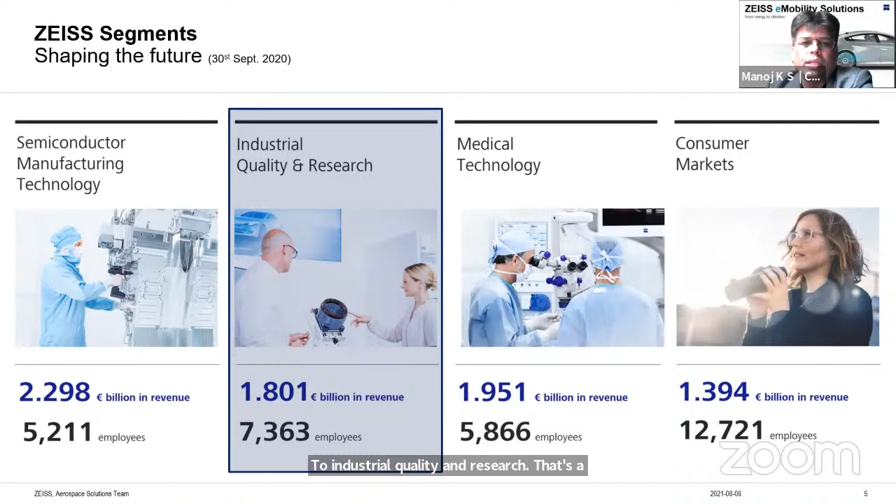I think Aanand mentioned that he has used Zeiss consumer lenses, and you could come into our Bangalore office where you can get these lenses tuned to you. We both, me and Hemanth, and this discussion belongs to industrial quality and research. That's the vertical we represent, so industry quality and also research. So these are the three topics.

Yeah, Hemanth, would you like to comment on this? Basically, industry quality and research is the division we belong to, and we are again subsegmented into industry quality solutions, and then we have a research microscopy solution.

So we belong to IQS, and here what we do in industry quality solution is the product we handle. Basically it belongs to contact and optical measurements, that's how we classify them, and computer tomography, which is basically X-ray based. Once we do the measurement, we do a complete analysis, and also we manage the complete data. So this is the product line we handle from industry quality solutions.

And from RMS, that is research microscopy solutions, we provide products like light microscopy, scanning microscopy, electron and ion microscopy, as well as X-ray microscopy. So these are the product lines the other divisions handle. But we, from industry quality solutions, have good connects with the industry, so some products like the light microscope or the electron microscope we also combine, and sell as a complete package to the industry, right from CMM to the industrial microscopy solution. That's the product range we have.

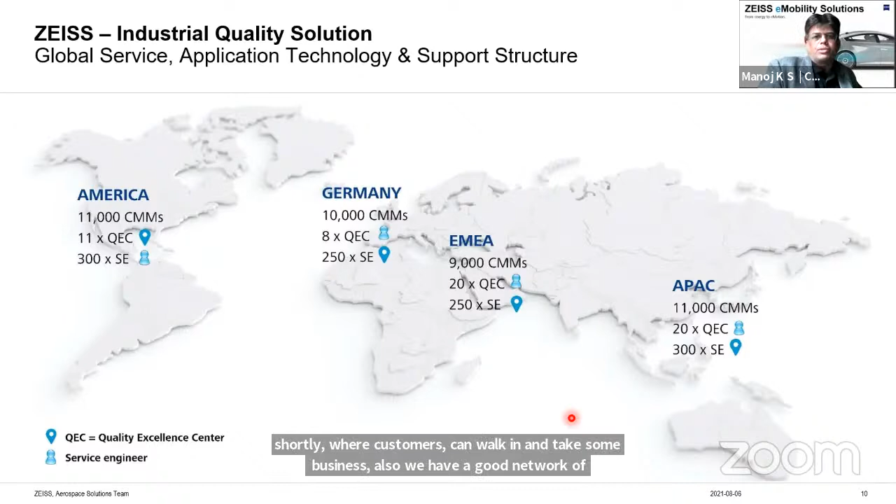Jumping into the subject, we all know we are at a crux of transformation, which has also been highlighted in the Samurai Awards discussions many times in past weeks. We are moving slowly from being an auto component and auto OEM industry into different areas like electronics, NEVs, and also the windmill industry, which is growing quite a bit, as well as aerospace, medical, and so on. A growing country like us would have to have good synergy among all these industries to lead forward.

Moving on, we would like to discuss these new industries. We'll pick up a few industries, a few applications, and see how our solutions are supporting customers. I would like to qualify one statement here: we are mostly into dimensional metrology, that is measurement of dimensions, measurement of heights, measurement of distances. So that is our key profile as a company.

Each of these industries has different problems. When you look at the electronics industry, the requirement is high volume. Whether it's USB sticks, mobile phones, or chargers, they are all made at huge volume catering to growth. So you need to be really fast, with a high-speed measurement technique to qualify the products. There are also complex micromechanical issues, because when you insert a USB charging point, the charging connector has to really sit properly. There are micromechanics inside which make it happen and make it reliable, and those topics have to be taken care of.

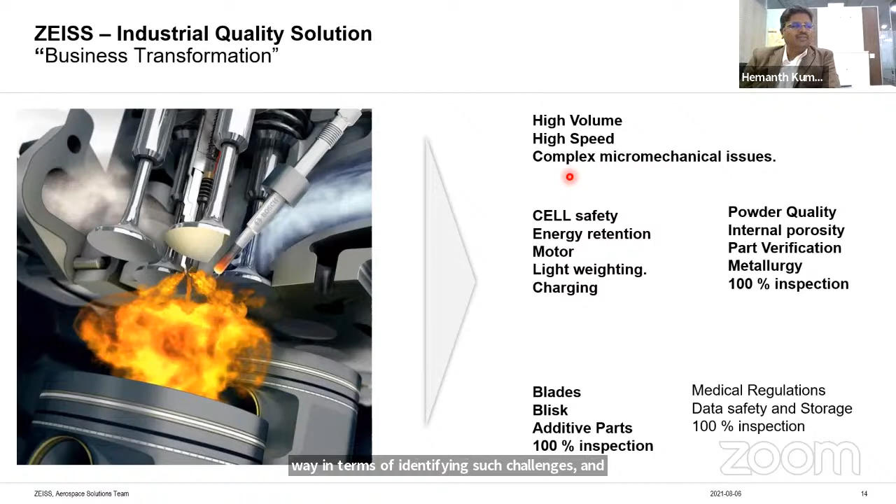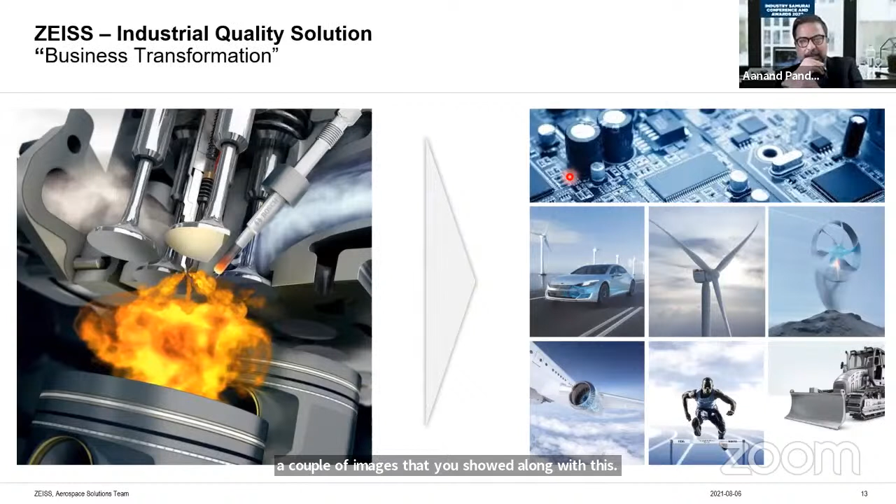I also had a question regarding the couple of images you showed along with this image on the left. What is that icon next to the windmill on the right side? This one? Yes, this one. It's like a trophy. Right, our marketing people imagine a little too much sometimes, so that's what you see here. Let me explain. What you see at the bottom looks like a mountain, but actually it is a powder.

And the powder gets formed into an impeller or a rotating element. So that's what you see there. So this is a new, upcoming manufacturing field called additive manufacturing.

This is again a complex field which is coming up because when somebody wants to rapidly develop a concept, rapidly develop a component, it is easy to develop it in additive manufacturing. It is almost like cooking. I don't want to get into details, but it is an upcoming field, very much useful in aerospace.

Also, I am told that when you are talking about cars which have personalization, additive technology will be used very much. Also in the EV industry, when we are talking about a few vehicles initially, let's say a startup wants to make a few vehicles, he will not go the standard process of mold making, casting, machining. He would rather do the whole process in an additive way. So additive manufactured cars are available, running in prototype and experimental stages. So very, very interesting field, Aanand.

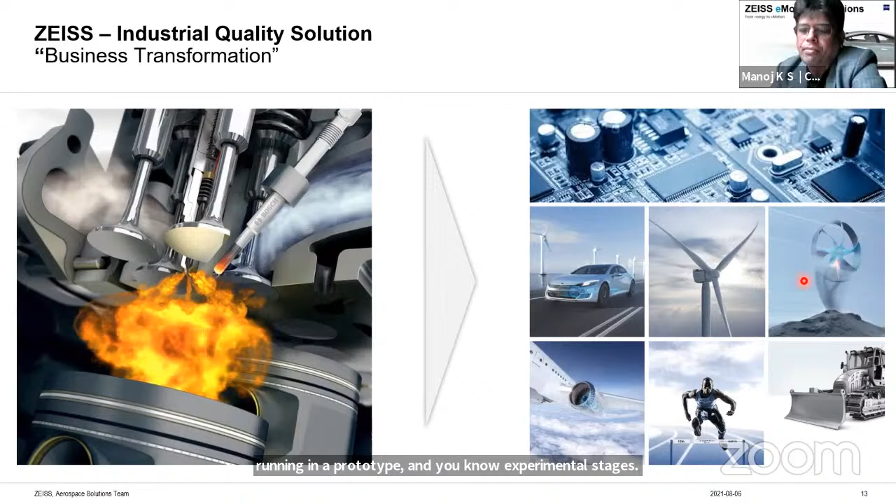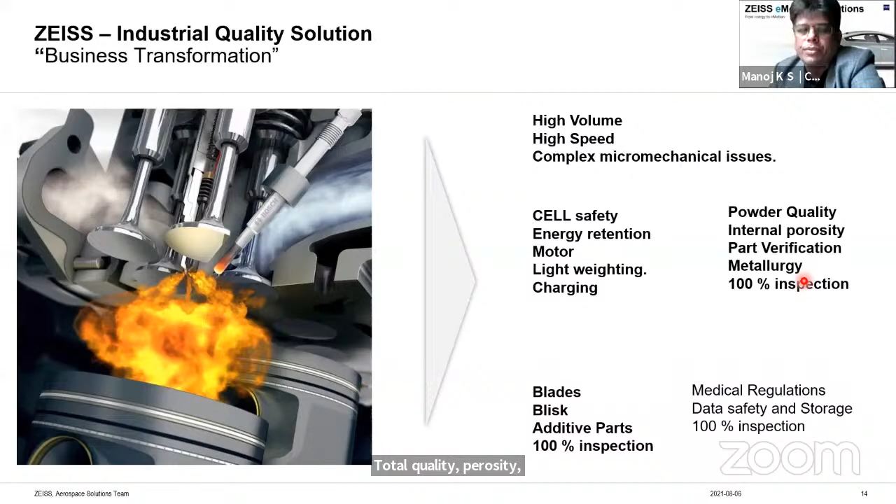And these are the challenges around that field, what we address, but we will not get into that subject today: powder quality, porosity, part verification, metallurgical topics, and so on. So does that clarify, Aanand? Absolutely. Yes. Okay, good.

Traditionally, as you know, Hemanth, metrology was a separate room. If you go into an automotive company, there will be a standards room or metrology room, which will be, say, about 200 meters away from the production area. So the production guy would walk in with a part every 1 hour or every 2 hours, depending on the process challenge, get the measurements done and go back, which would roughly take from the time the part is cut to the measurement result in the hands of the operator about 1.5 to 2 hours. There are thermal issues around it, why there is a time delay.

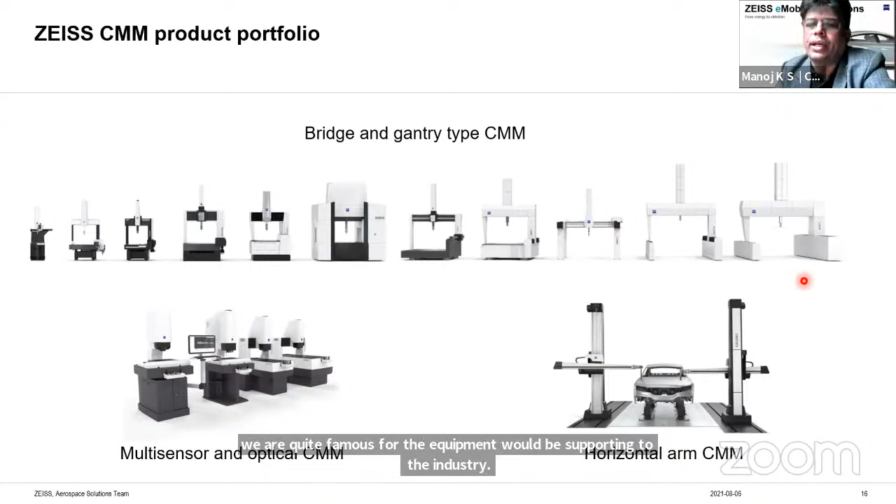So, thanks, okay, we'll now jump directly to this slide, which we are quite famous for - the equipment we supply into the industry. Talk about any OEM, any tier 1, tier 2 in India, they have a plethora of these machines, so we will not talk about this in detail.

Talking about new age industries, the electronics industry has a lot of micro issues starting from a few nanometers and so on. We will discuss this a little using microscopy solutions. Also a key topic that will create a paradigm shift in the industry - we will talk a little about batteries, lightweighting, car body and so on in the new energy vehicle space. We can move on, Hemanth, or do you have any questions?

Yes, I have quite a few questions on this slide, so we could address those later during the discussion. Aanand, do you have any question? Yeah, I have many questions on this. Oh yeah, okay, answering them could require some time. Maybe we could take these up during the following discussion. Okay, perfect, so we should cover ground.

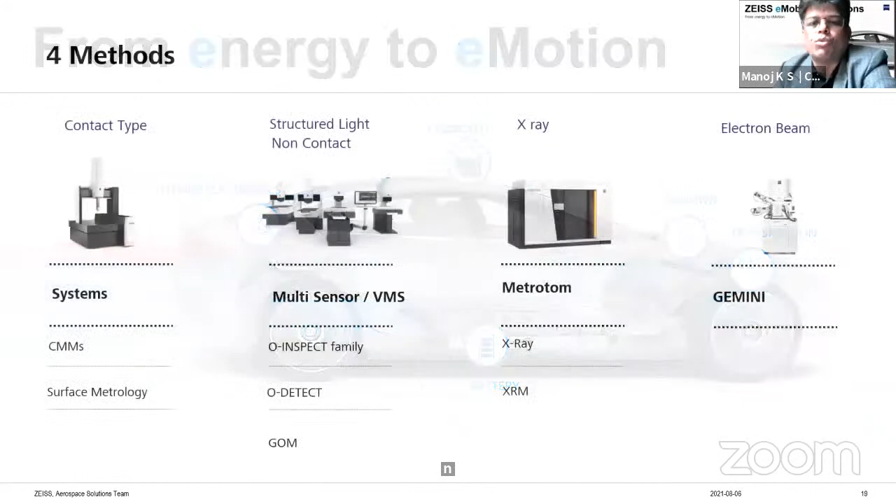So let us move on. Let me quickly tell you that as a measurement company, we have 4 methods of measurement: contact - touch and measure; see and measure; throw a structured light and measure; and the third one, X-ray - X-ray the component and look at everything inside.

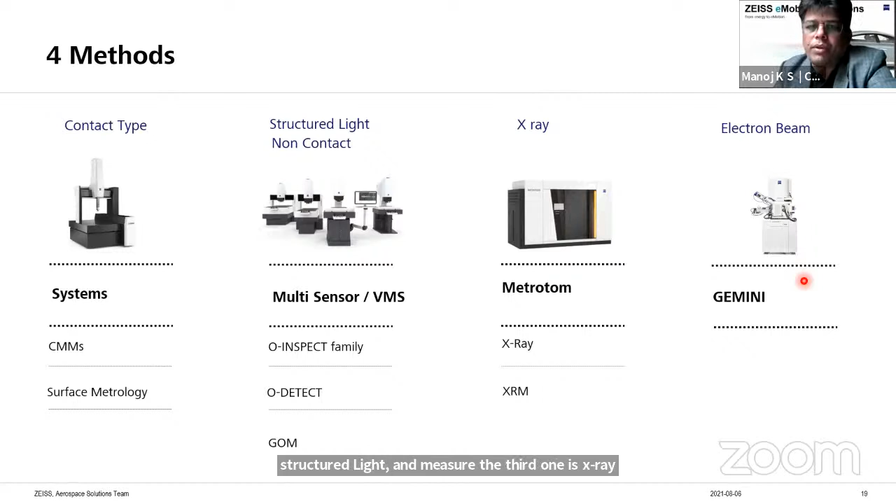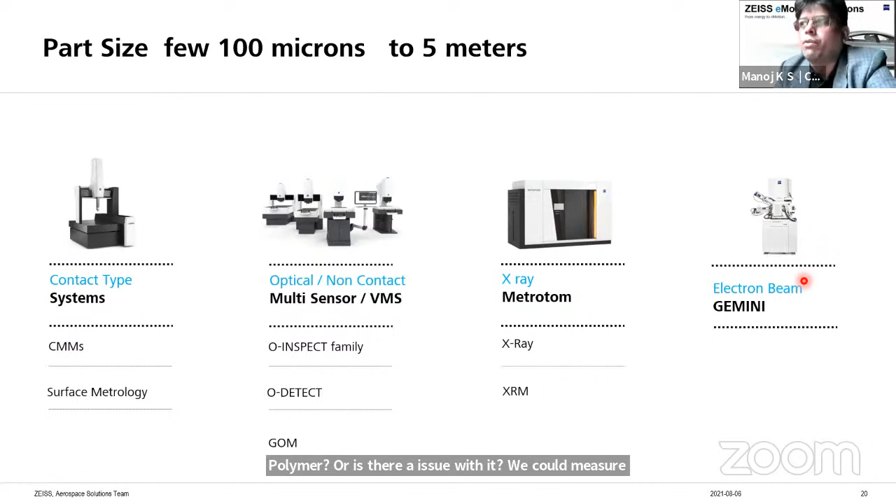That is a topic we will discuss in detail today with Hemant. We can measure anything from a few hundred microns - if you have an issue, if you have a residue that is captured and you want to find out what the residue is, whether it's a metal or a polymer, or if there's an issue with it, we could measure anything from a few hundred microns to about 5 meters for its dimensions, and a little bit of chemistry.

Now this is the most famous slide Hemant is very familiar with. So Hemant, please go on.

Thanks, Manoj. So basically on the X-ray product, we broadly classify X-ray into 4 groups. On the top left side you see a Metrotom, which is basically a high precision metrology and inspection machine. These Metrotom machines sit in a lab, and here with X-ray we focus more on the resolution aspect. In general, what we do with X-ray is place a component inside the machine, and the output is a virtual image of the part - a representation of how the part looks inside in 3D space.

So the part can have porosity. If you want to see the porosity, you can measure it and classify it depending on size. This is what we do on an X-ray machine. So one part is porosity, and in high precision metrology and inspection Metrotom machines, we not only see the defect, we also do a measurement, just like how we do it on a CMM. The advantage is whatever you see from outside you can measure, and whatever you are not able to see from outside, inside also you can measure.

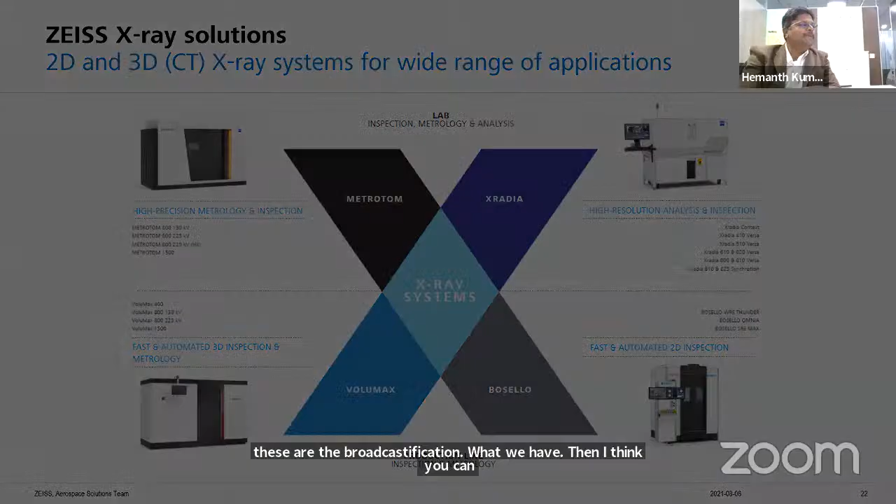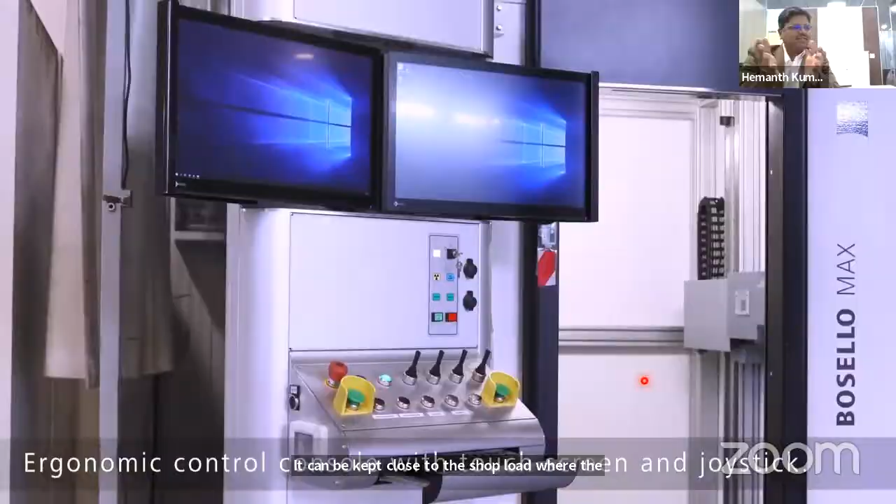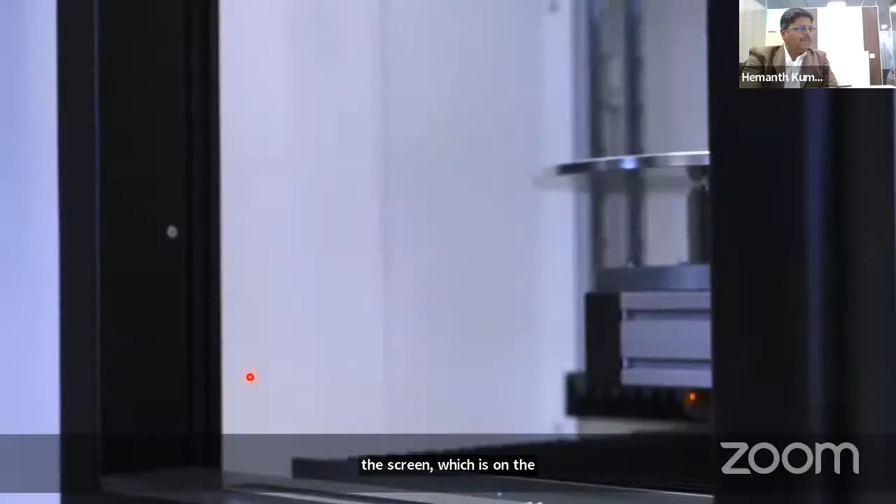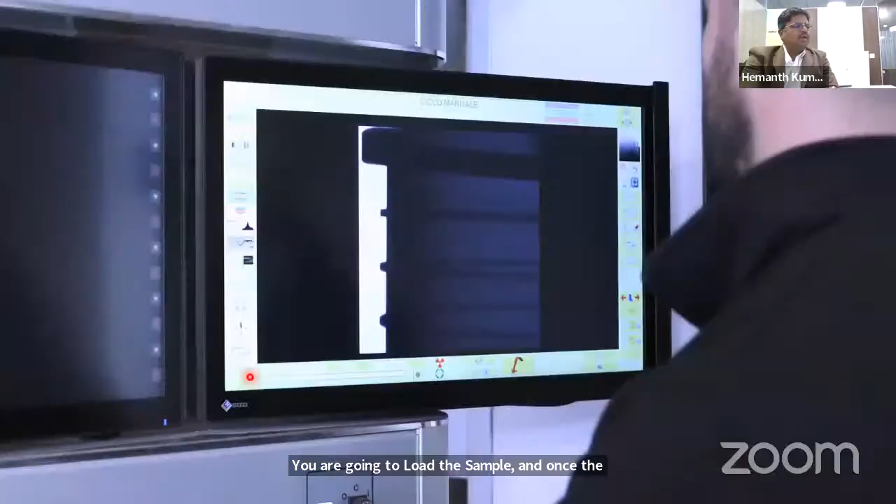Yeah, this is the shop floor machine. This machine we call an at-line machine. It can be kept close to the shop floor, wherein the part, as soon as it is cast from the casting machine, can be brought into this machine. Here you see the detector on the screen on the left side, and on the right side, this is the X-ray. We have a table coming out, and on top of the table, you load the sample. Once the parts are loaded, this is the complete X-rayed image of the part.

So here it can show you some defects, and there are analytical tools wherein you will be able to check whether the part is good or bad, and whether the defect inside is allowable or over the limit.

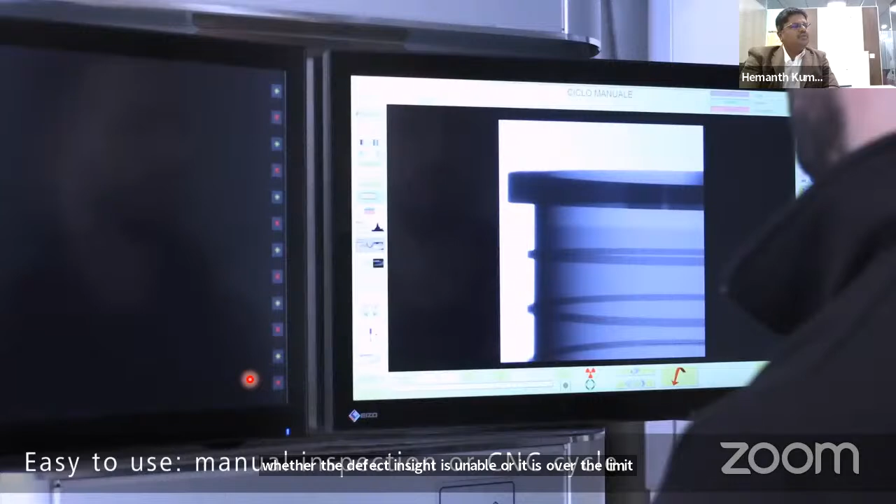The video is stuck. Yeah, now it's moving. So these are certain analytical tools.

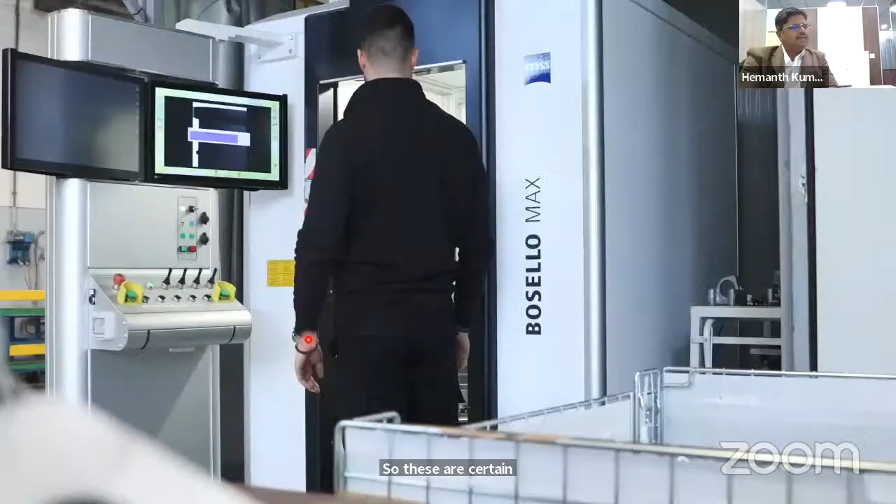Yeah, once the parts are inspected, it is done. So this is how it is normally done on the production floor. The requirement of the industry now, because of EV, there are a lot of safety factors coming in, and more requirements for 100% inspection. So the machines you saw in the video are used for 100% inspection for some of the critical components.

So that component, what was there, Hemant? Looked like a motor casing. Yeah, it's a motor casing, and the porosity in those casings is very important. That goes into EV vehicles, and they look at this porosity very critically. That's where we help our customers identify defects in those parts, and there are already a lot of users of our machine in this particular application. I may also add, the component you saw was a motor stator.

You may think we have been making motors for many decades, so what is the need to check an EV motor so stringently? The point is EV motors are now made of aluminum, not iron casting like a typical motor. The reason they moved to aluminum is all components in a car are dead weight except the passenger, whose transport is the basic purpose, not the heavy structures. So the designer's mind is on lightweighting. The motor casing is hollowed out in many places, keeping only the structure intact. So when you hollow out and thin it out, you need to check and compare the integrity with the design model. That's the basic purpose why X-ray is being done.

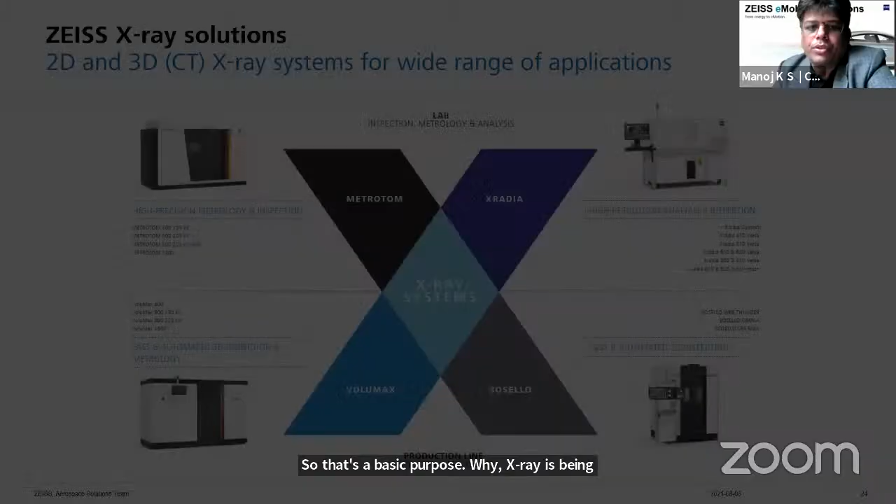Good, so let me now shift to 3D. What you saw is a two-dimensional X-ray, similar to what a doctor would see. If you recollect, we mentioned operator judgment, and Hemant showed certain tools in the video. If you go to a doctor and he looks at the X-ray, it's basically his judgment to tell you how good or bad the issue with your bone is. Here in industry, we wouldn't like an operator to do that. We want automatic software recognition, AI recognition to do that function. So that's part of the 2D X-ray tool, that you could have automatic defect recognition in the anode, cathode, or these kinds of casting components.

Okay Hemant, I'll move on to the 3D topic. Basically both in 2D and 3D we have automatic defect recognition software, which enables the operator to make the judgment faster. These machines are kept in serial, and all the parts that come in get measured and automatically move on to the line. So this can be completely integrated into an automated line as well. This is how a few industries are using this machine.

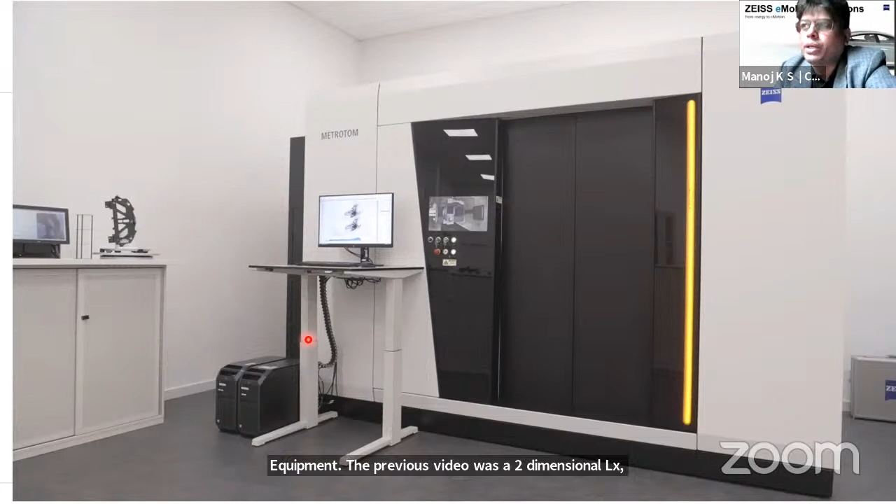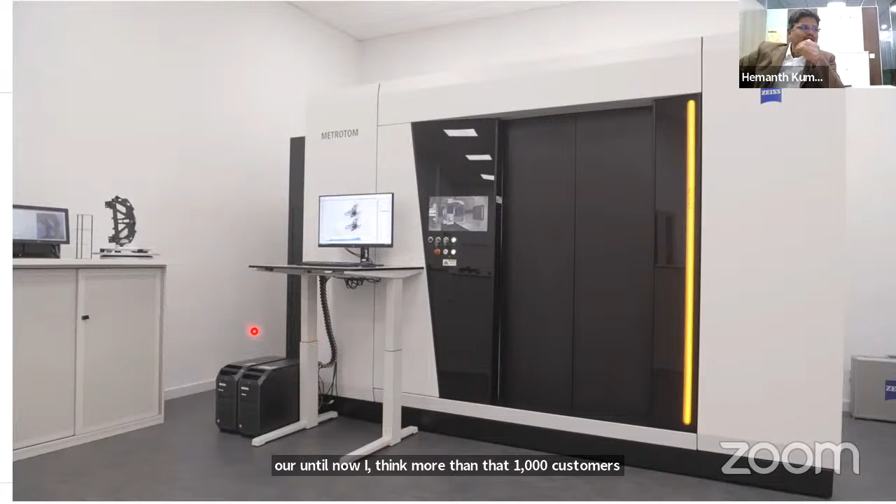Good, so here is another video with different equipment. The previous video was a two-dimensional X-ray; this is a three-dimensional X-ray. Do we have this equipment in India, Hemant? Of course, yes—in our Bangalore facility as well as in Pune, we have a Metrotom and Volumax machine in both facilities. We cater to more than 1,000 customers who have visited our tech center and taken measurement services from these machines. The results for them are absolutely unbelievable, because all these days they could only see the features outside. Now they can see what is inside the component, and the biggest advantage is the design-to-market time has reduced drastically because of this technology.

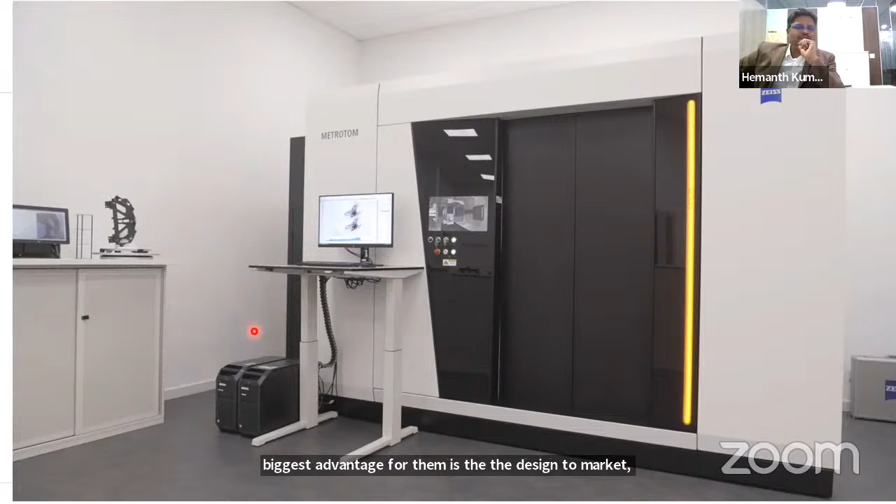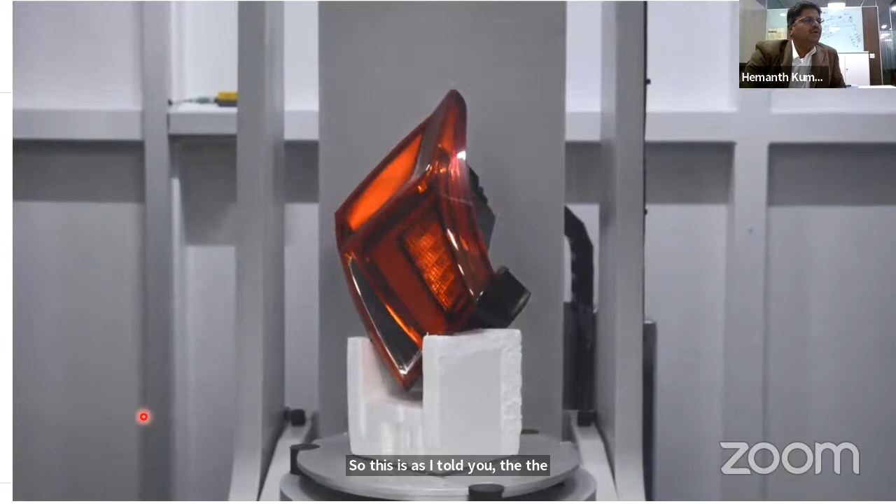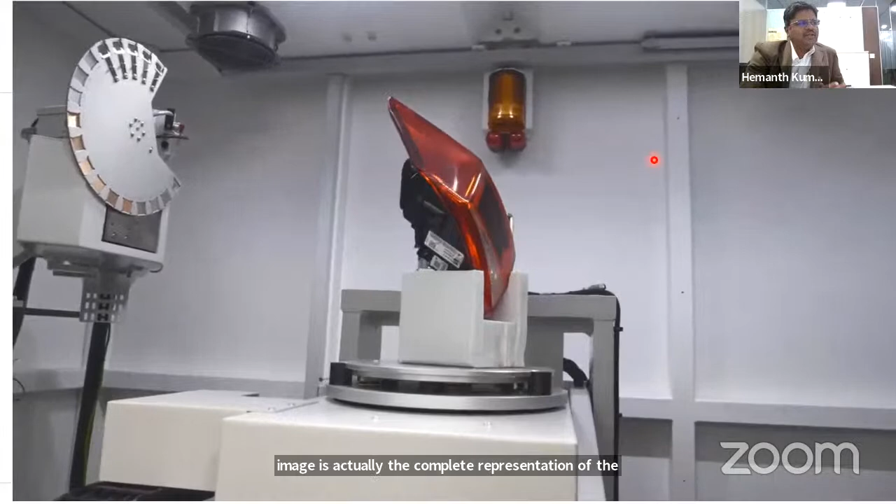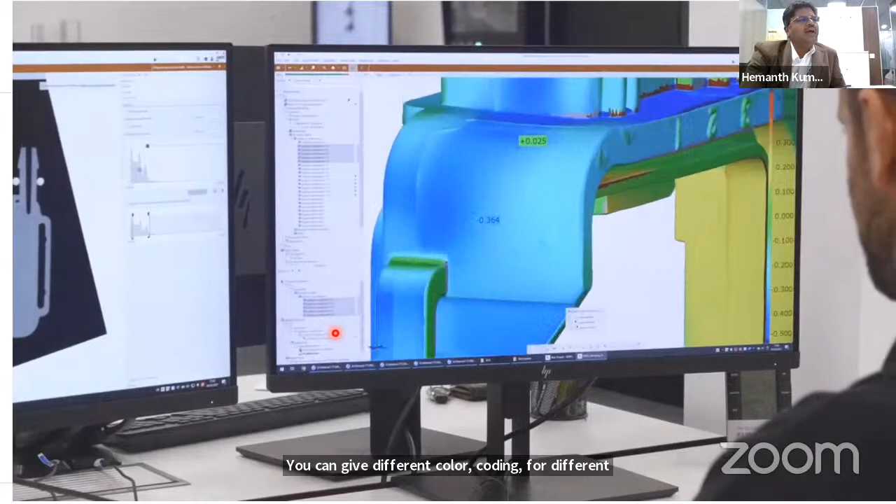That's how closely we scan a component. It can be a plastic part with a lot of other materials, or it can be an aluminum cylinder block or cylinder head application. This is how you visualize the image. After scanning is done, you can give different color coding for different materials, and then do a virtual cut section to see how things are placed inside. If there are any gaps, you can do measurements with absolute precision, because we guarantee the accuracy of the machine just like we do on a CMM.

So, those virtual... yeah, yeah.

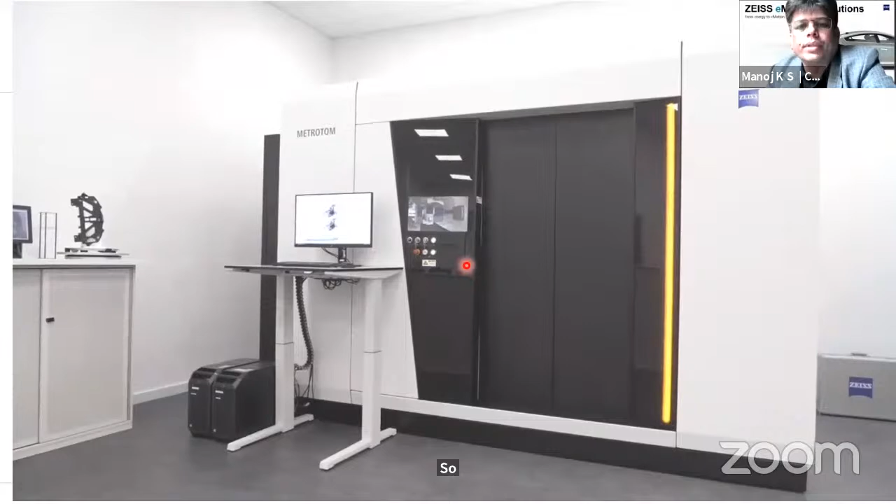I just thought of adding a point: if people would like to get their parts inspected, which are multi-material with multiple layers involved, and would like to check the parts before sending them to the customer, you're welcome to talk to us and we could do this.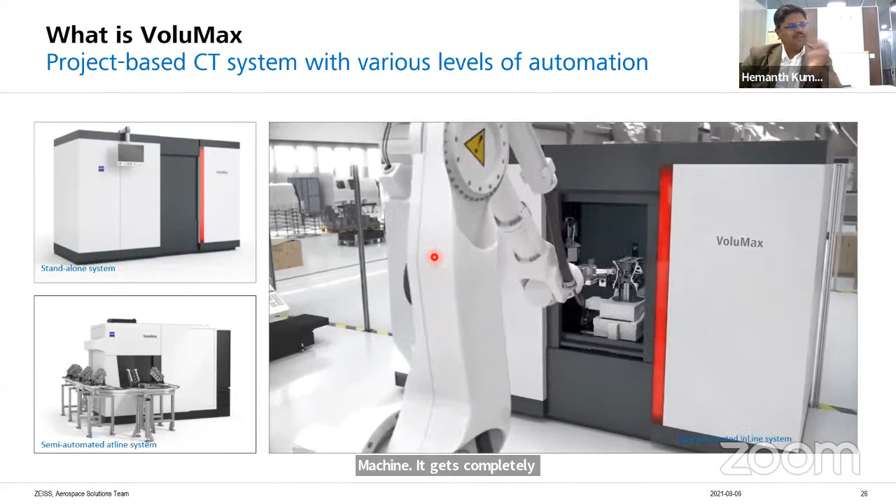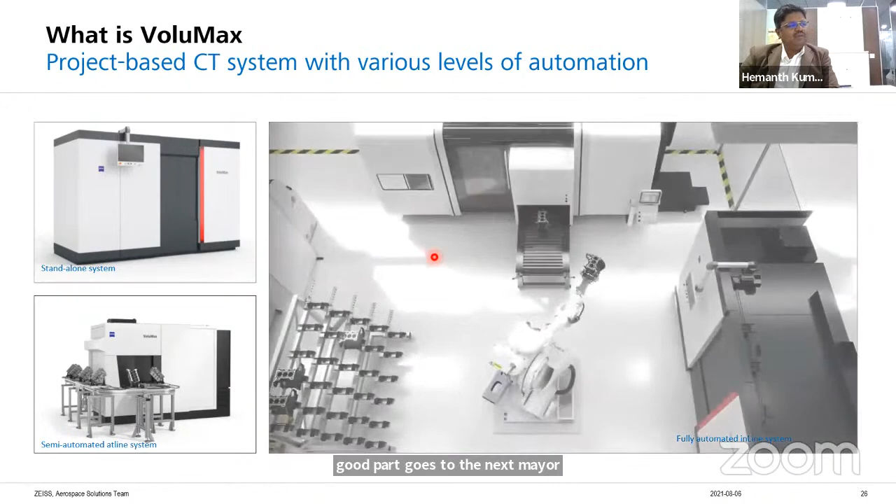After the measurement is done, it goes to the machining center. The advantage is only the good part goes to the next machining phase, and because of that you save a lot of energy and time. This is an important factor for all industries now, and VoluMax helps customers to a great extent.

So the names Metrotom and VoluMax are names for the functions, but they are basically 3D X-ray systems, and they vary in the location of measurement, the resolution, and so on. This looks like an animation to the viewers, but actually this is a reality.

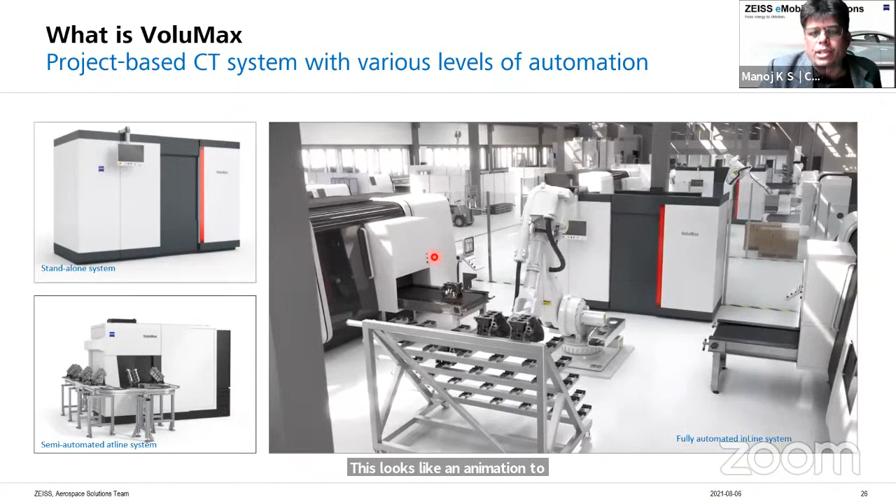This is happening in many companies around the world for different applications. I think Hyundai uses this technology, BMW uses this technology, Nemak. Those are a few companies which are using this technology.

Just to give a consumer view to this, we have scanned a phone, and you can look at how a phone would be seen as you scan it from the top. The phone is kept in a horizontal mode, and this is the X-ray report of a phone.

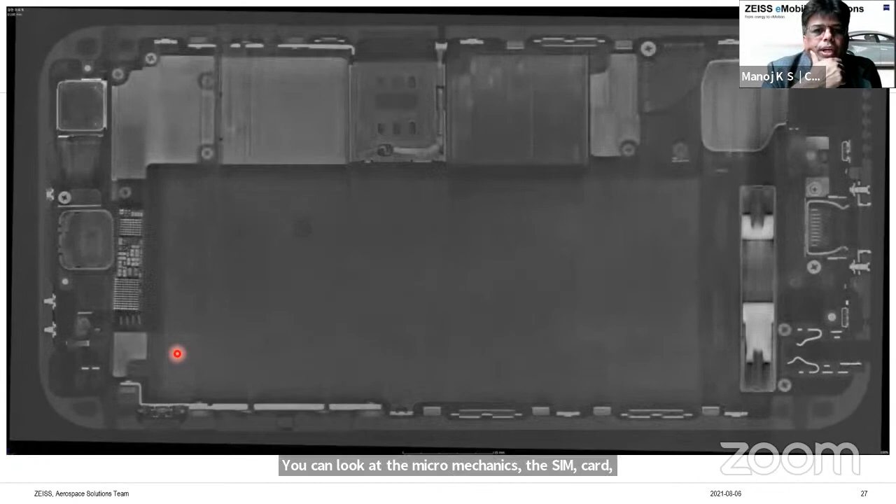You can look at the micromechanics, the SIM card slots, the camera, battery. You can look at the connectors in detail, the SIM card ejection systems, electronics around it. So if you have a failure, it's easy to inspect visually, and you can learn a lot of abstract data to see how things can be controlled. So CT is also a tool used for failure analysis.

Yeah, I have a quick question before I miss out, and then we go past these slides. This is about the 3D X-ray solution.

Now, my question is that with 3D we have an extra degree of freedom, as they say. For manufacturers, switching from 2D to 3D solution would, at least in India, require a lot of capital expenditure, particularly for an SME player. So in what circumstances or for what needs should an SME business consider a 3D solution, and what would be the typical requirement for which we should invest in 3D X-ray technology from an SME point of view?

From an SME point of view, I would say the business case has to fit in first. This is a quality tool, and cost has to really fit in the Excel sheet, so your question is valid. Where an SME could look at is how to use the tool to get quickly to the end product.

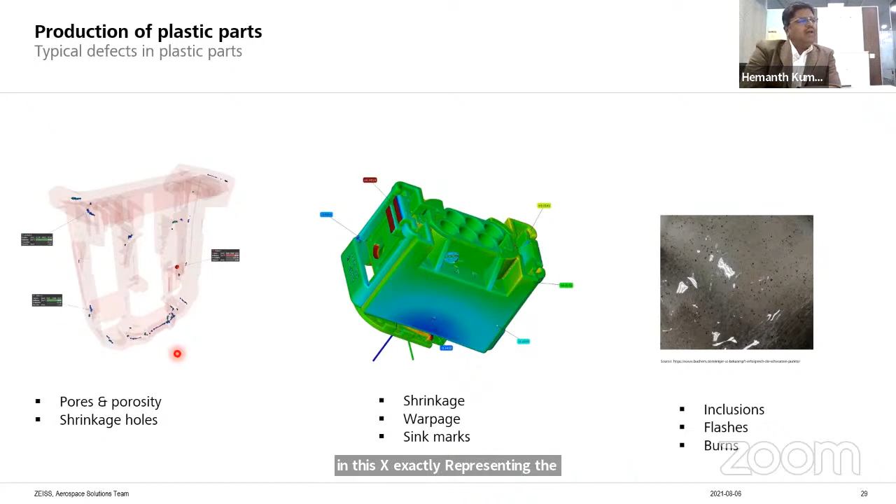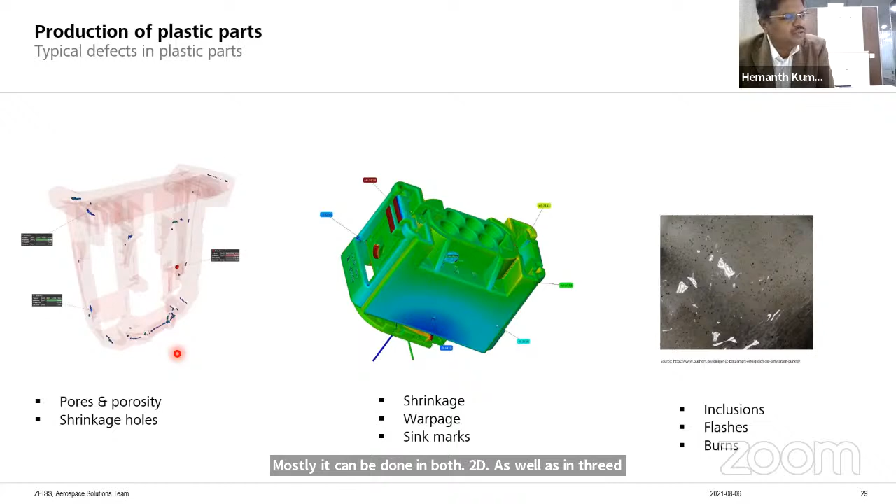The blue ones are the places where there is less material, the red ones are the places where there is more material. Also, shrinkage and warpage analysis can be done with this tool. In the last part, you see some inclusions, flashes, burns. Mostly it can be done in both 2D as well as 3D. All the software tools are available with us to do the complete analysis on the X-ray machine.

So this is, as we were mentioning Anand, about shortening the manufacturing process. From the requirement in research, you move to product and process development and production of the item. Then you have an initial sample test report. Then you go into serial production once a customer approves. So your question was very pertinent, Anand.

As you can see, computed tomography can be used to evaluate whether all the components fit together and are assembled in a non-destructive way. You can measure and see if things are right in a non-destructive way. This is how we could support even a bottle and a cap manufacturing industry to see if it fits, because it is made in huge volumes and timing is important, whether it's a new shape design or summer is approaching and you have to put millions of bottles in the market. So timing is quite important in these industries, and CT technology can really fasten your development of dies and molds.

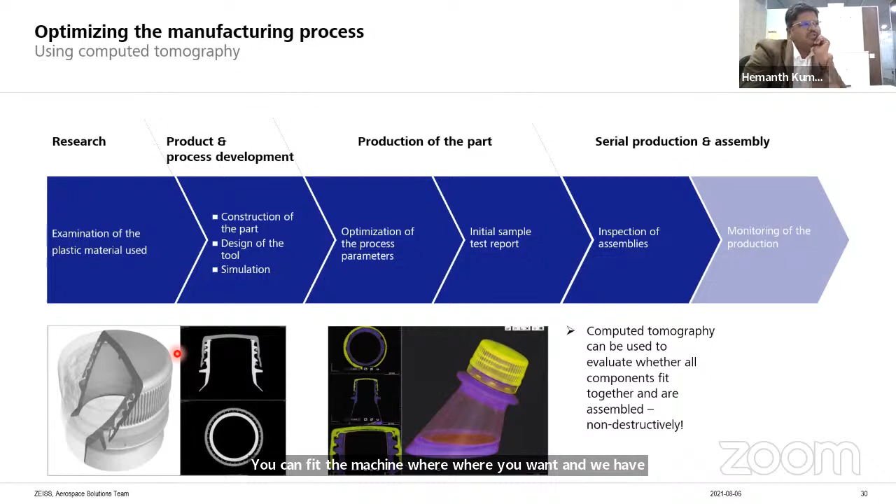Yeah, it completes the complete process chain. You can fit the machine where you want, and we have a solution for the complete process chain, right from research to serial production and assembly.

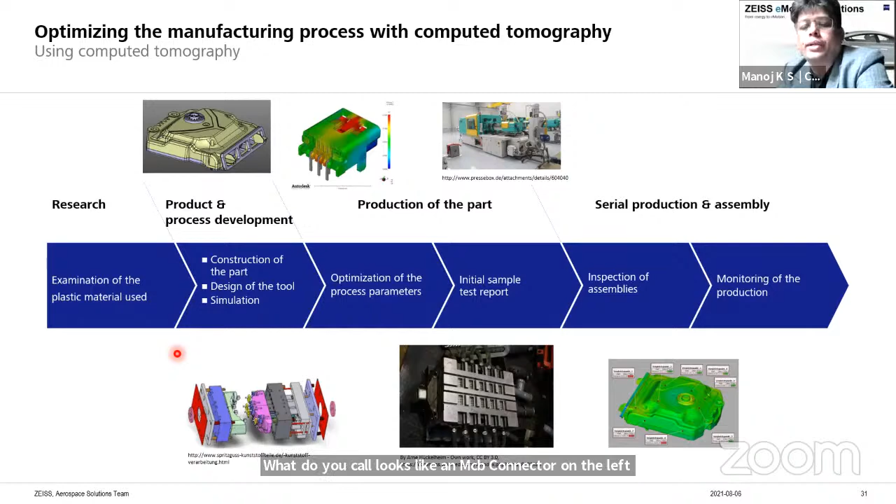Another example of die and mold for a connector, a complex one, looks like an MCB connector on the left, and tool and die on the right, the plastic on the right. So similar applications are possible. From the initial sample test report, you are able to go faster, give faster feedback.

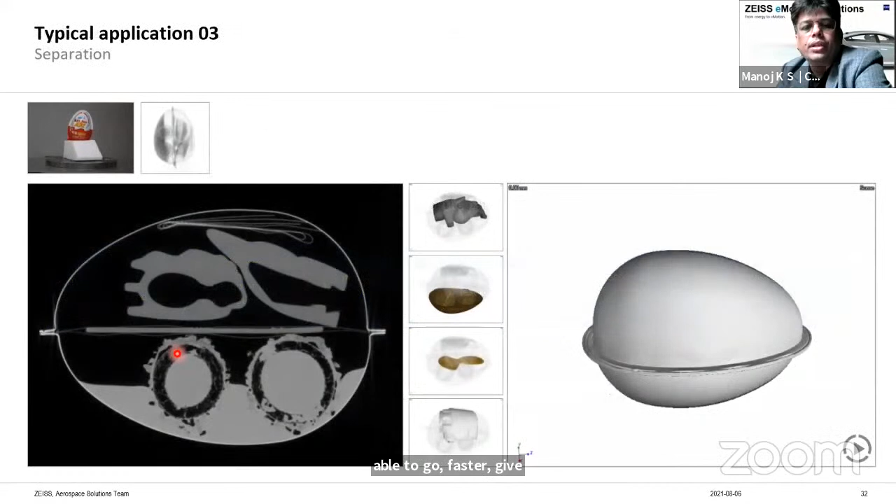This is just for the viewers to see how Kinder Joy, a common toy, a common candy that you buy for your kids, has been CT'd, and you can see the various parts of it - the edible part, the plastic toy which is inside the Kinder Joy, and also the separator and the tool to eat the candy.

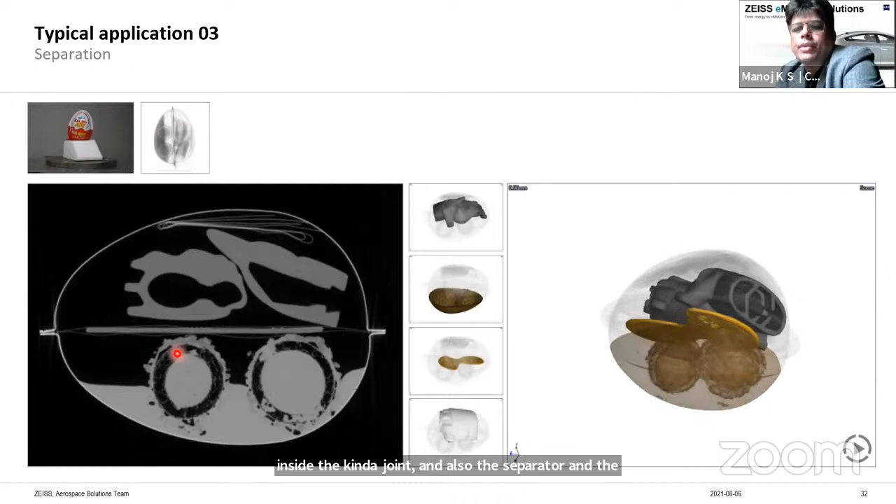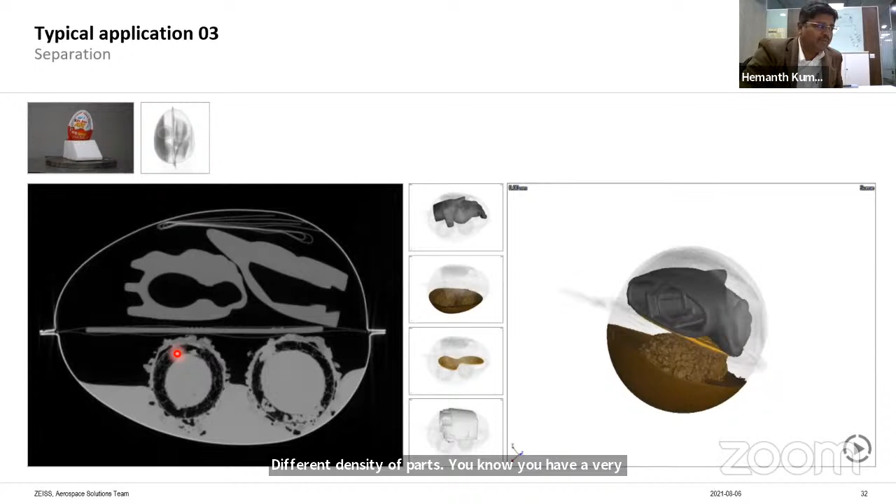Basically, what we represent here is that the chocolate has different density of parts. You have a very soft material, the chocolate, you have a plastic, and you have a paper inside. So everything can be scanned, and the representation is in different gray levels.

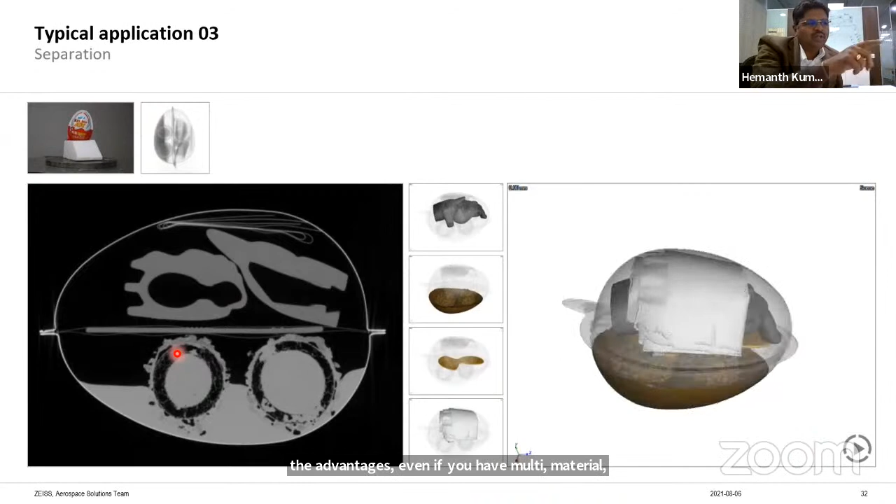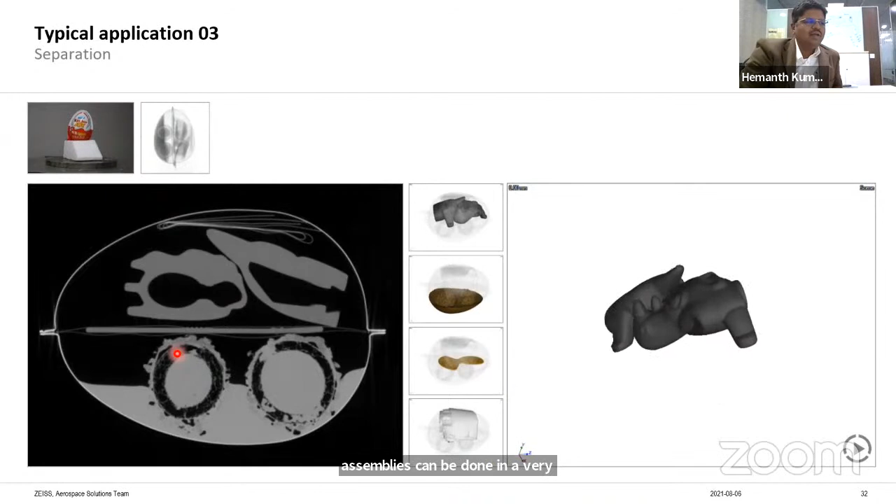The advantage is, even if you have multi-material, you'll be able to scan it and do a segregation. Now you see only the toy which is visible because of different density, then you see the spoon, then the chocolate. So this kind of segmentation of the assemblies can be done in a very easy fashion, and this gives a lot of visibility for the designer and for the manufacturer.

Connectors are very complex. They look very simple as we use them, but please imagine that every connector has at least about 300 to 350 dimensions, and it takes a hell of a lot of time to qualify them. CT provides a very quick solution to qualify these connectors.

There are two pictures on the right side. The challenge is, you have a metal insert on a plastic. On the left side, you can see the metal pins are not clear, which means the edge definition is not good. So we have a certain software tool wherein we correct these edges with a special tool, and on the right side you see a clear image.

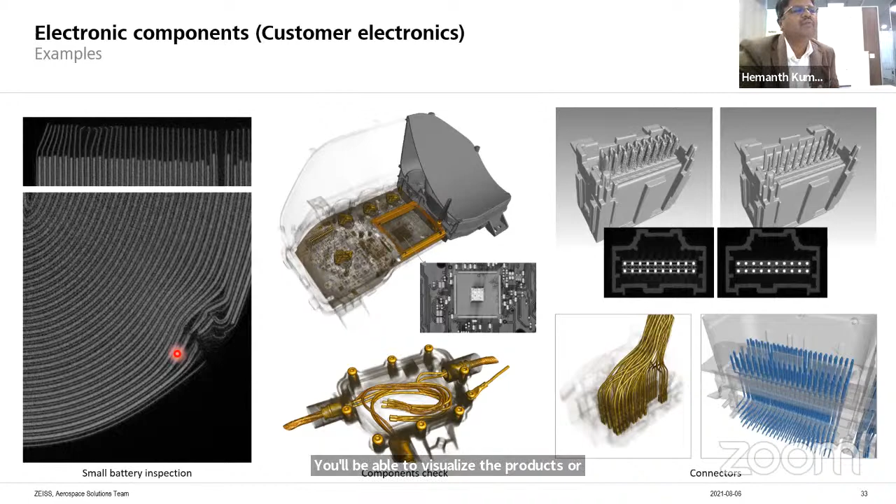So these are the challenges which the industries will face. But we do have the right solution to offer the customer, wherein he'll be able to visualize the product or the part, which is very good for the measurement aspect.

Next slide. So this is again coming back to the EV. You see the motor on the left top, and the motor has copper hairpins which are getting welded. What you see on the second image is the welding, and there is one weld in the middle which has a huge porosity, black color porosity, what you can see.

So when there is porosity, there is less current flow because there is higher resistance, since the two metal bodies have not welded together. If there is current flow, then more heat is generated and there is loss. So this can be visualized at the bottom.

You can see all the weld areas can be seen separately in a CT scan. Thereby you can qualify if the tolerances of porosity are being met or not, what is the volume, what is the void level, what is the size of the void, and what is the morphology, whether it is oval, what is the shape of the void, and the volume inside the void can be calculated.

On the right, what you see is the battery, and the layer below, the black and white gray area, is basically the anode and cathode layers. So you could look for defects and visualize, and the battery engineer would be able to see things that normally he would not have seen once it is assembled.

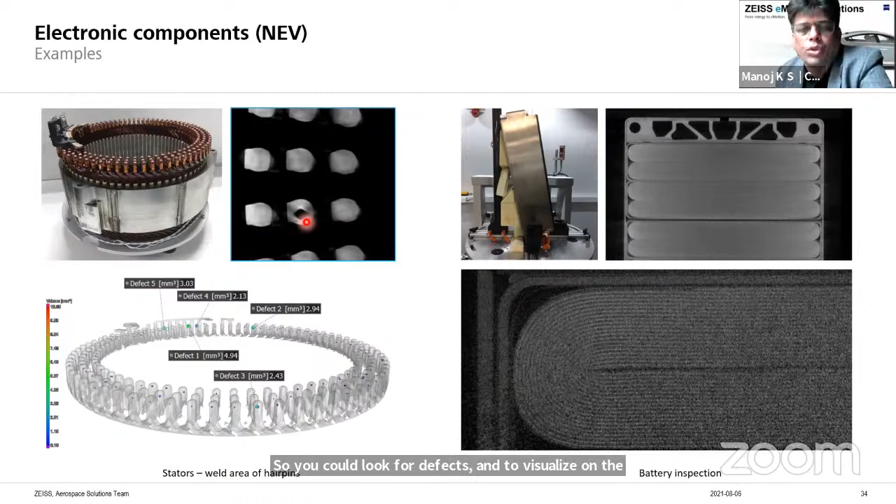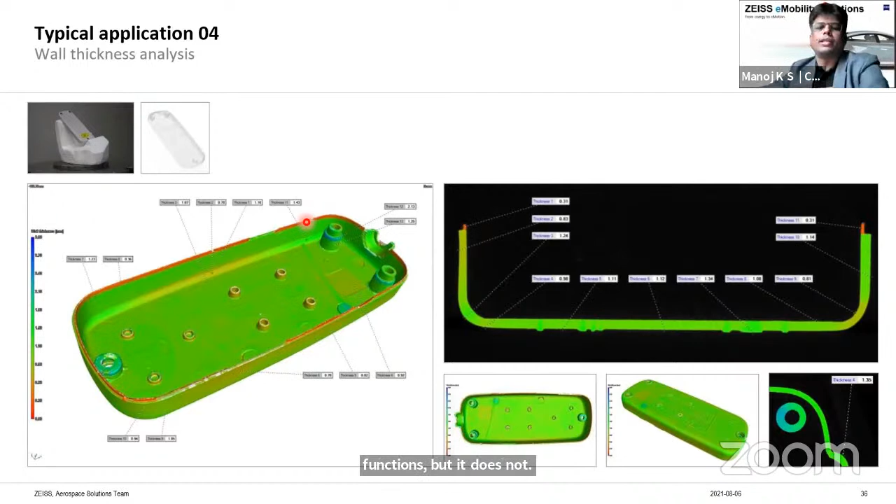Moving on, I think we covered this, the bottle cap example. Wall thickness is another common area, again coming to the point of using less material concerning an environmental topic. So the thickness has to be reduced to a point where it functions but does not fail. So you want to look at wall thickness in the hidden areas, under the latching mechanisms. That can be visualized very nicely.

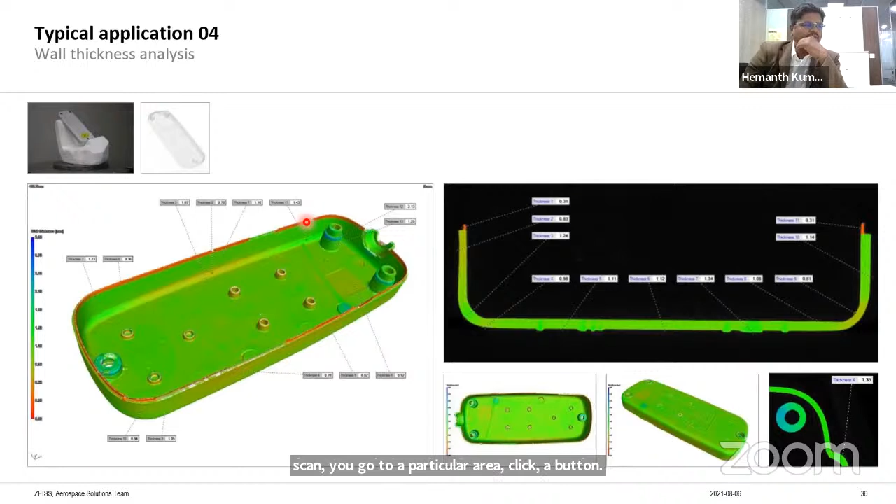Anything from your side, Hemanth? Actually, the current process takes a lot of time. If you have to check the wall thickness across different sections, the current process takes a lot of time. But here in a CT, the advantage is once you have the scan, you go to a particular area, click a button, and you have the entire details in a few seconds. So that's the speed at which computer tomography works.

Okay, so summary slide.

So in summary, we can measure parts from 1 millimeter to close to a meter. The resolution of such systems starts from 3 microns to 300-400 microns. Depending on the type of component and its intricacies, we can scan the part in a minute, or it can take up to 10 hours.

So these are the few possibilities. We can do metrology, or just a basic analysis, or just a visualization - all are possible. Everything we measure has an accuracy component, because the standards are specified in Metrotom as per ISO standard. So whatever you measure has traceability.

This is how Metrotoms are used in industries now, and we have a good number of installations in India and across the globe. This technology is the future, and we see a lot of potential in the coming days across all the sectors we discussed - EV, additive, medical, electronics, and even the plastic or toy industries.

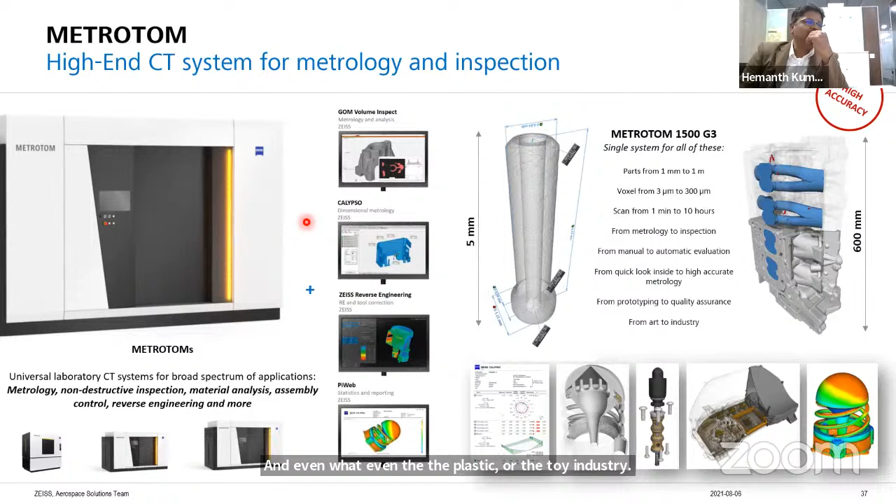So this is the use of Metrotom to the complete industry as of now. Good, so summary slide - 10 points, if not more. First is save money - I would put that as the first point to the industry. Second is make the invisible visible.

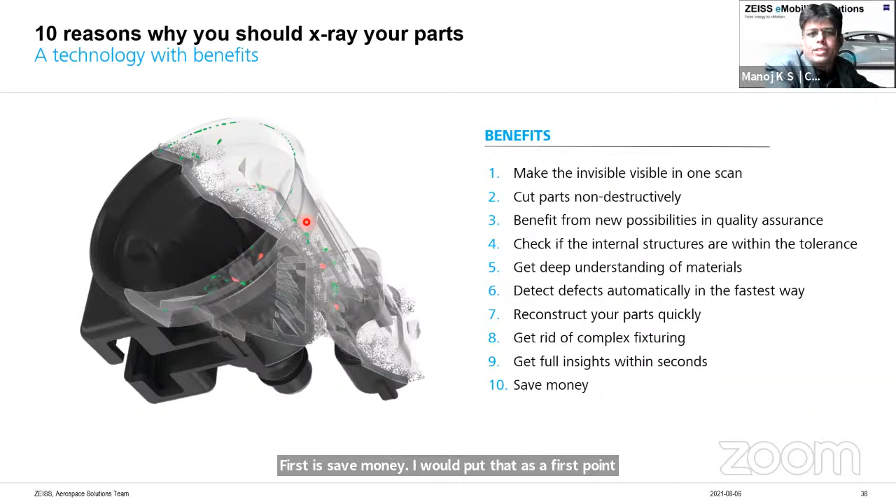Don't have to cut parts. Get a deep understanding of what goes on inside your components. Reconstruct your parts quickly in a simulated way. It's complex, but you don't need any fixturing for Metrotom. Just put the part inside and start the measurement, getting full insights, if not within seconds, at least within a day. So that's the advantage.

So the technology, if not made in India, is available in India - please make use of it, talk to us. Now we'll move on, we have maybe another 5-10 minutes, to another topic related to batteries.

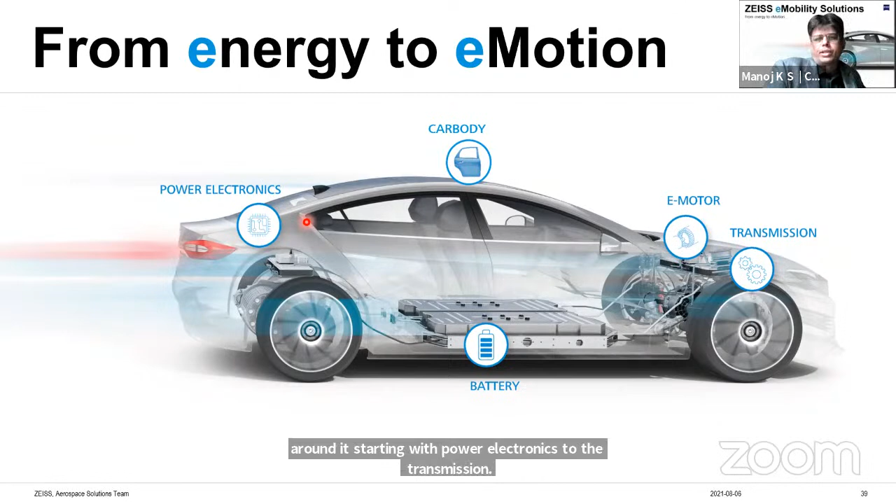As you see here, in a new energy vehicle you have a battery tray at the bottom, electric motors, transmission, car body and power electronics. We are able to measure everything around it, starting with power electronics to the transmission - any dimensional topic.

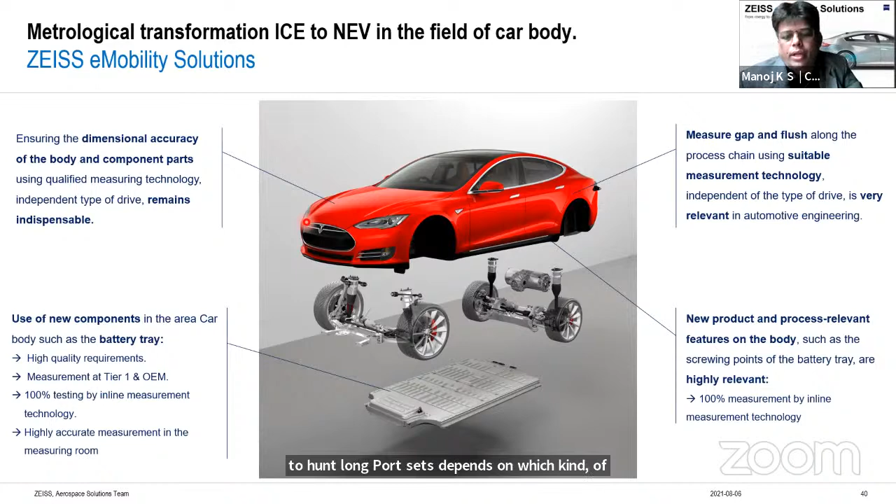If you break it open, you can see the battery tray is at the bottom of the vehicle, generally covering the length between the wheels. It would contain about 3,500 to 4,500 individual cylindrical cells, or about 80 to 100 long pouch cells, depending on the manufacturer's technology. But the requirements of the battery tray remain similar.

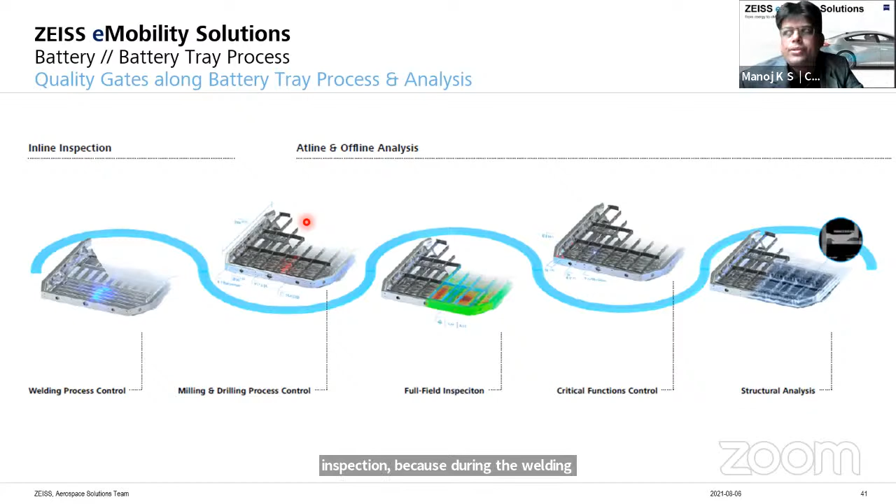If you look at the process by which a battery tray is made, there's a welding process that forms the tray. Then you need reasonable accuracy, so you do milling and drilling of the different holes and locators. Then you move to full field inspection, because during welding things would have warped, and you want to see at which stage the warping happened.

Coming to critical function control - a question might come to mind that the battery tray is just a tray, like a coffee tray. Probably, but actually this battery tray is quite a complex item, because the energy dissipated in the batteries is the most important factor for safety - dissipation of energy generated during the charging and discharging cycle of the cells.

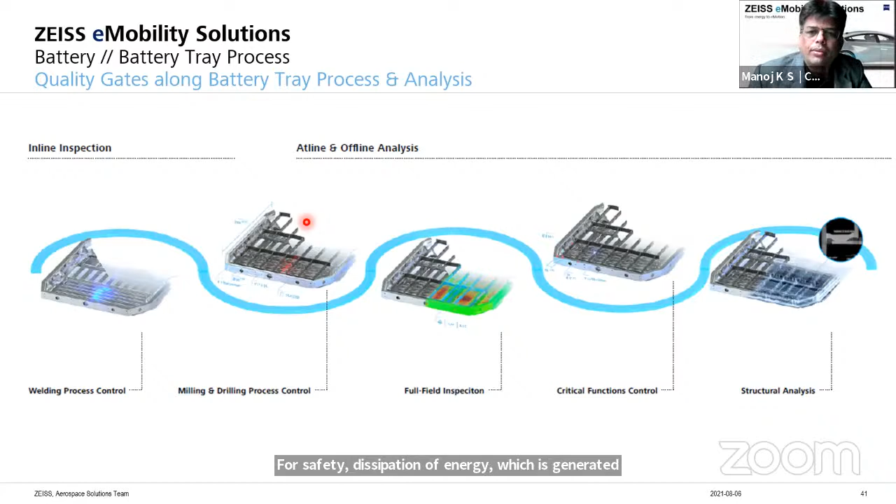So the tray has to have a cooling system, a cooling mechanism - it's almost like a radiator. It's a combination of a battery tray and a radiator, to take the heat away and be very rugged in the event of a crash. It serves multiple functions - it has to keep the batteries really safe and also dissipate the heat out.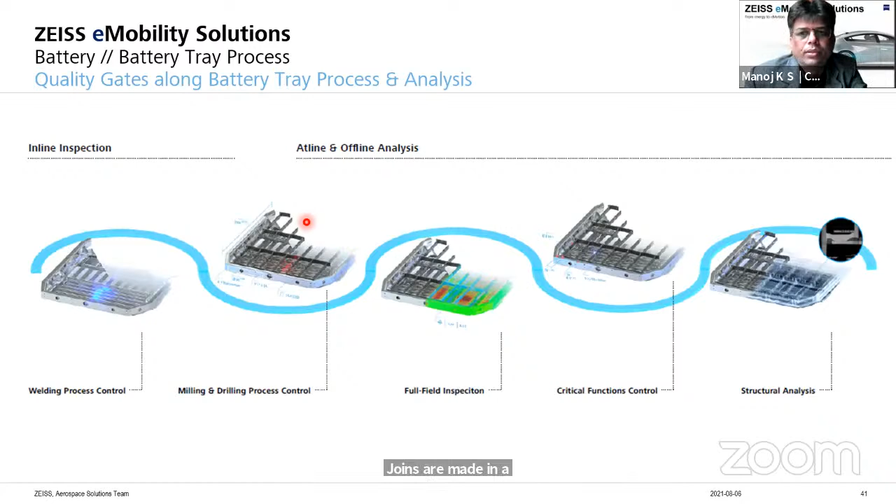So there are many factors involved in a battery tray, and hence the base item of the battery tray requires a lot of measurements, including measurements in the X-ray, which is the structural analysis of the weld joints, made in a CT.

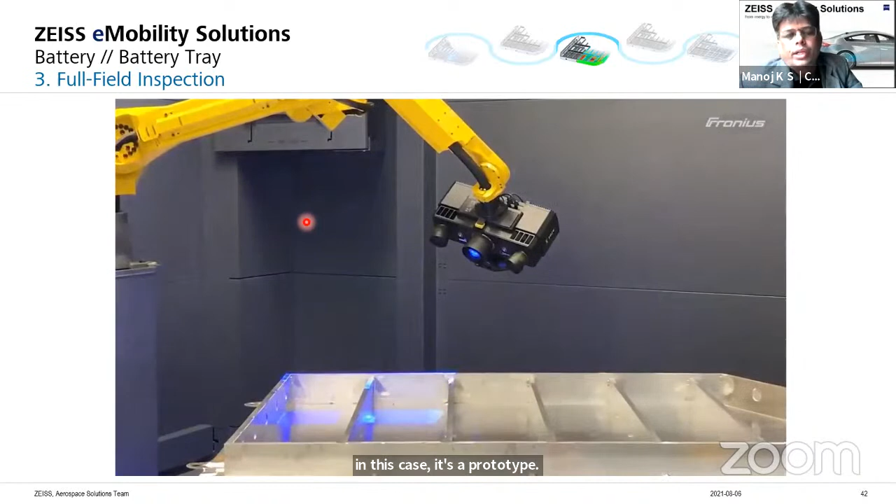This is a short video. In this case, it's a prototype battery tray being measured using another technology called GOM 3D structured light measurement method, by which we can measure the tray, collect the information, and give you information regarding the dimensional integrity and warping topics.

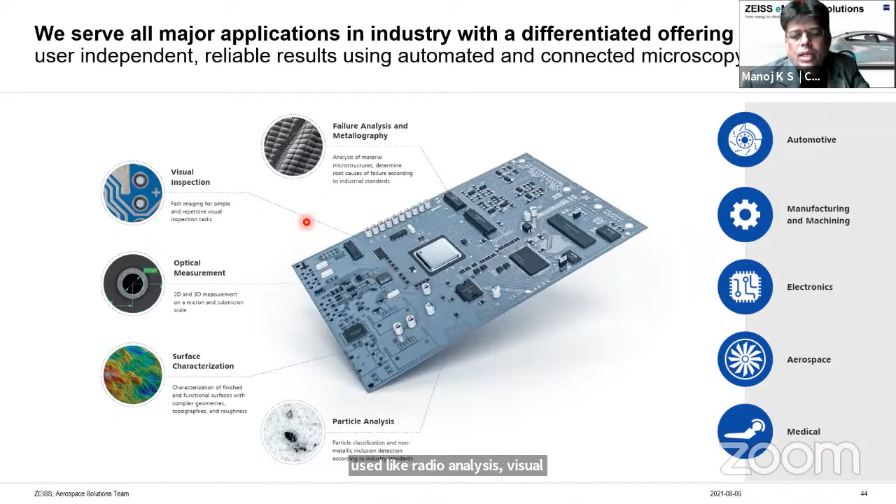Coming to the car again, if you look at a car in future, in about 7 to 10 years from now, when you buy the next car, you'll be paying more for the electronics, the PCBs, the control units, ADAS systems, and so on. So there are a lot of topics around these cameras and electronics, like failure analysis, visual inspection, optical measurement, and so on. Let's look at some solutions being offered using microscopy in these areas.

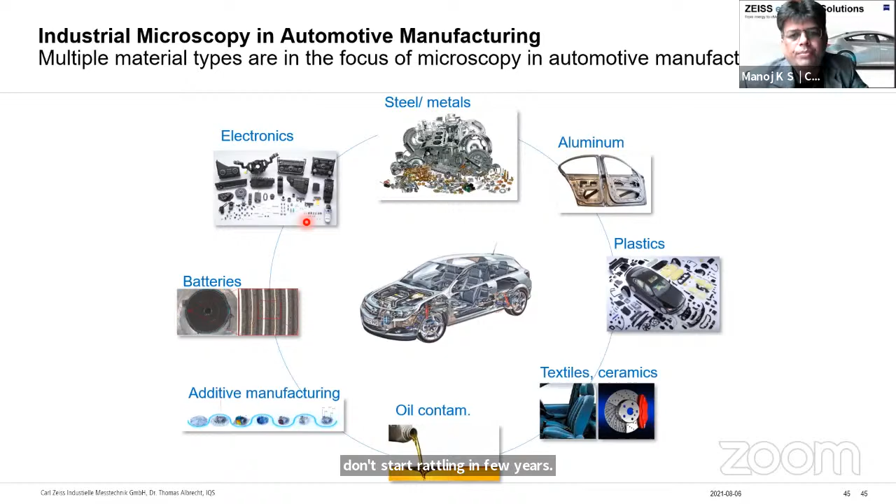These are the areas where we are involved. Some examples are shown here, starting with using microscopes for finding out inclusions in the steel used in the car. Looking at the welded seams, there are a lot of welds around the car body, and these welded seams can be inspected using optical measurements to look at the quality of the weld.

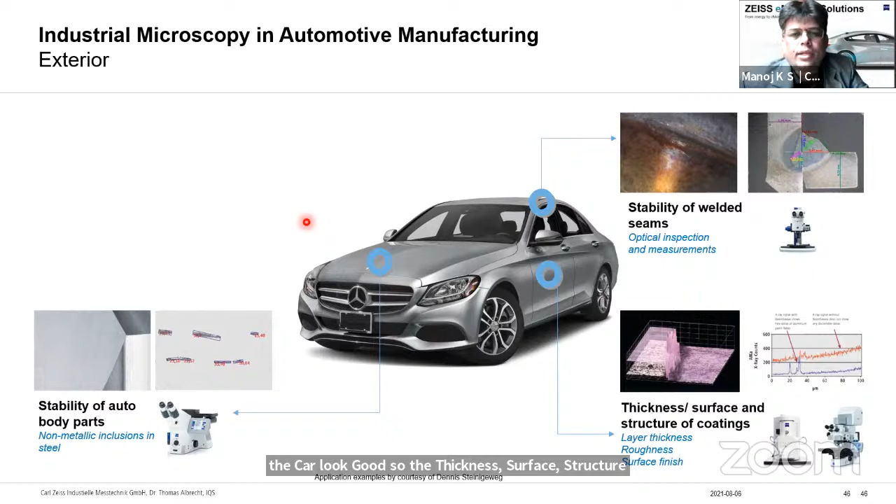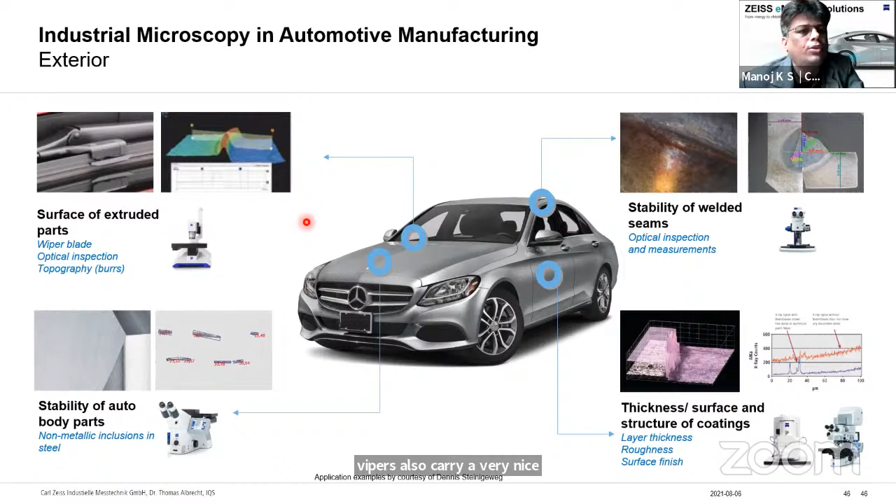Coatings - a lot of coatings make the car look good, so the thickness, surface structure of coatings, the kind of surface finish which gives a nice reflection on a high-end car - there is a surface finish quotient involved here, and that can be measured. Extruded parts like wipers also carry a very nice definition of the contact area, which can be seen using digital microscopes.

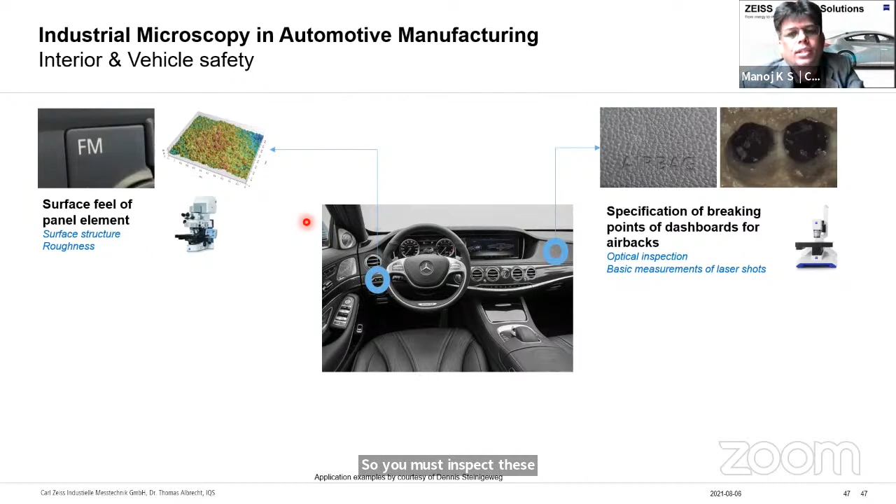Including a very key safety topic - when you have an airbag, you have micro weldings done around the airbag locations, and they have to work. So you must inspect these laser shot weldings to see that they have the right structure so that they get released in the event of a crash.

Display issues and defects on plastic components can be seen. Again, for the IC engine - let's all be clear that the IC engine is going to stay for at least about 1.5 to 2 decades, let's not bid adieu to it - there are topics around component cleanliness, oxygen sensors, spark plugs, issues in ceramics, and so on.

So this is one area of our involvement, our solution space, which is not very well known - the microscopy topics. We would like our customers to get back to us.

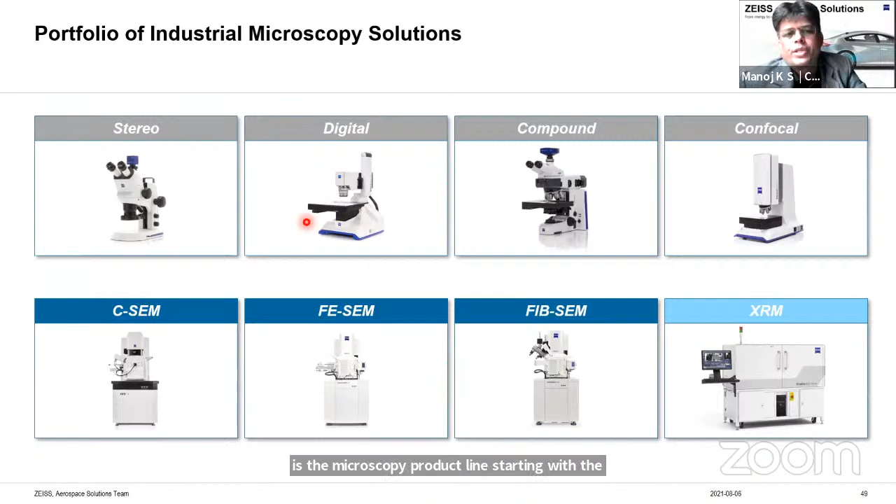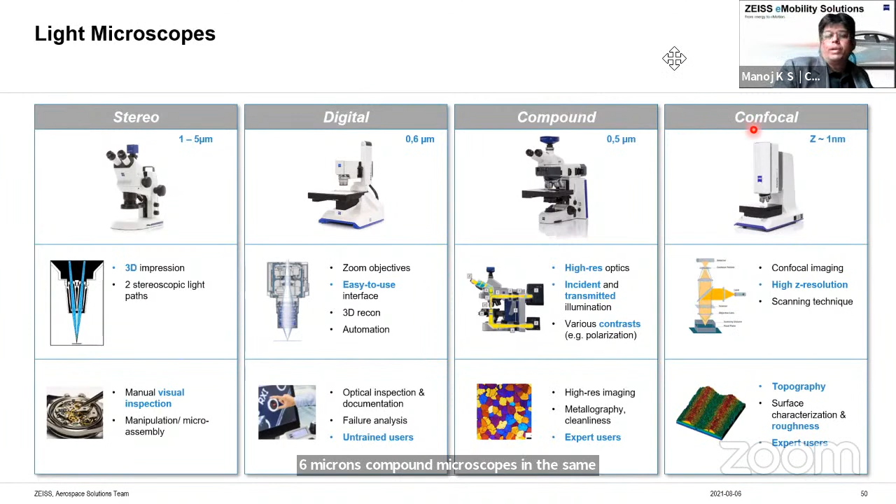As a product line, if we have to show - we showed you the CT product line, this is the microscopy product line, starting with stereo, digital microscopes, compound microscopes, and confocal systems. They work at varied resolutions. Stereo works at about 1 to 5 microns, digital works at about 0.6 microns, compound microscopes in the same area, and 1 nanometer could be achieved using a confocal technique.

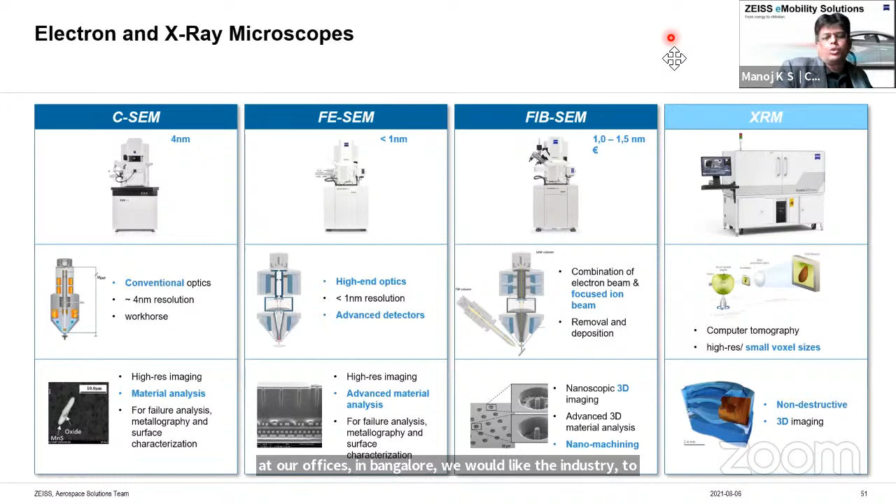Still, this is not good enough if you talk about failure analysis in the industry. So we have X-ray microscopes and electron microscopes where you can do a lot of material and failure analysis at the nanometric scale. Again, these equipments are available at our offices in Bangalore. We would like the industry to take advantage of it - come, walk in and do a pay-per-use service.

Just to give you an idea, if you have a digital microscope and want to inspect PCBs, it could be the production guy who wants to do this, and we have a solution. If you want to look at a failed part that's come back into the company for inspecting electronics failures, it could be the R&D guy, and we have a solution space for it. Again, our solutions have different software to do the same job. If you want to look at failure analysis in deep detail, we have different equipment for it. If you want to look at technical cleanliness in your process in the automotive IC engine, we have a solution space. So we are industry agnostic, and we can provide solutions to a variety of industries.

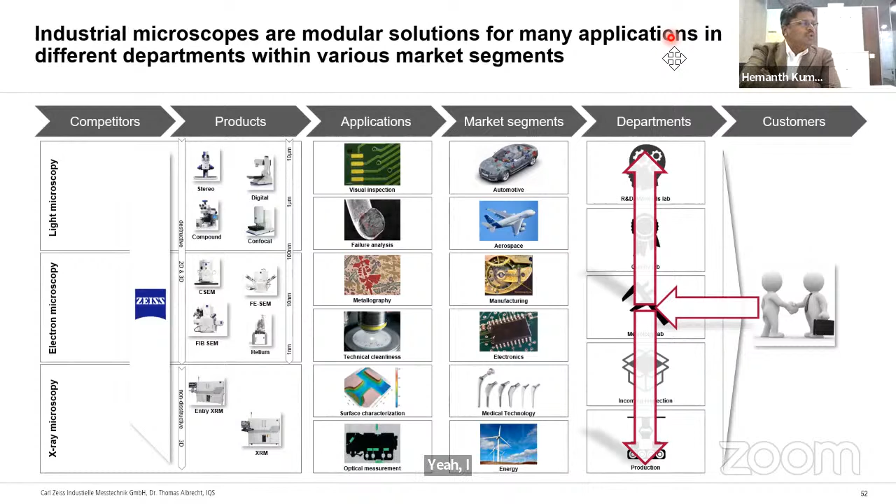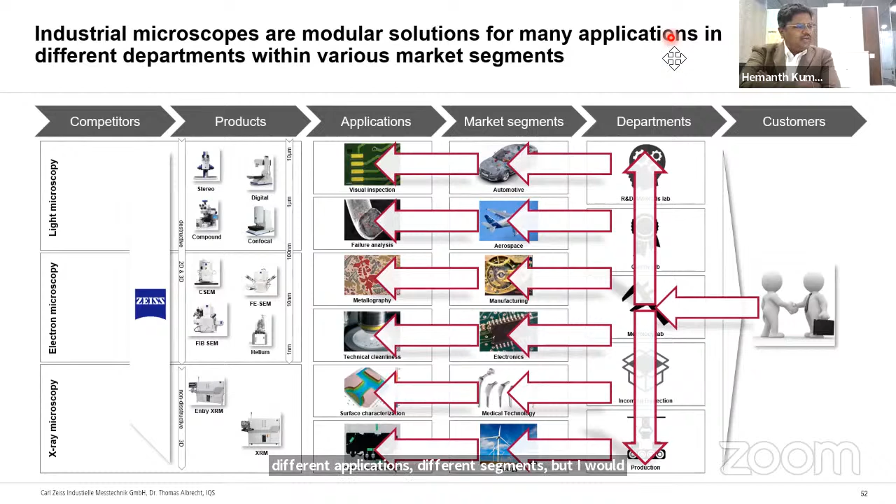I think, Hemanth, any last comments from you? Yeah, I think we have shown the complete product lines from both X-ray and microscopy, wherein there are different applications, different segments. But I would say in all the segments we are there, and we are supporting our customers through our various QECs. There are product experts available who provide solutions for their challenges, and that's how we are trying to help our industries move forward. So I would like to request the listeners that if you have any such challenges, be it measurement or analysis topics, please approach us, and we are there to support.

Right. Yes. So, Mr. Anand, or listeners, if they have any questions, I think we are there to answer.

Absolutely. Thank you so much, Manoj and Hemanth, for that very, very informative presentation. I was like a child in a toy store, and I'm sure that's how our viewers also feel, because we do hear a lot about Zeiss and its technologies, innovations and inventions over the years. But this is the first time we got a deep dive into the many solutions that your company has been providing us, whether in machines, and your company touches us in so many ways, from diagnostics, from medical to the movies. So it's quite an experience. The last hour flew past, and I thank you once again for these insights.